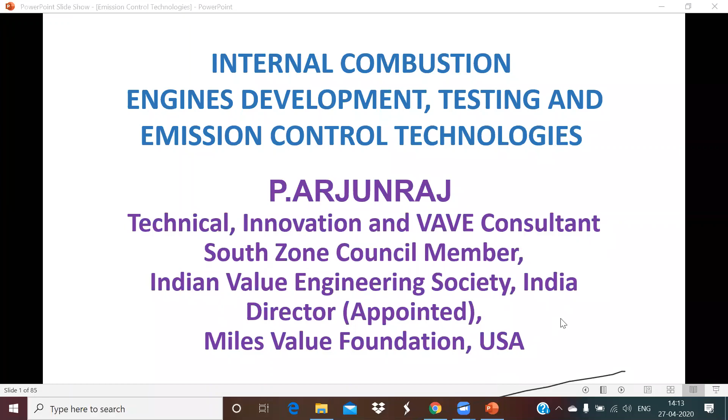The first one hour, I'll just give some brief introduction. As you know, all of you are from mechanical background, so I want to touch upon some basics. I request everyone to put it on mute.

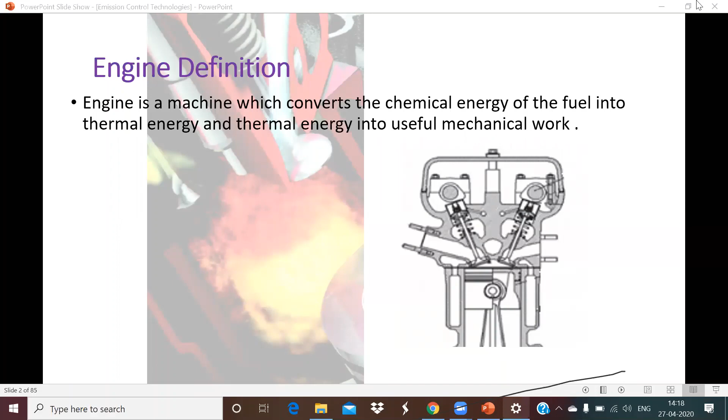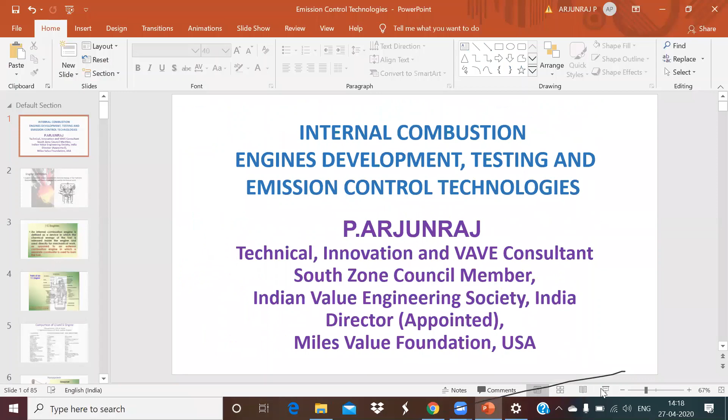I request everyone to mute, actually, because I'm getting disturbance while taking the seminar. So as I said, the law of conservation of energy is happening in an engine. An engine is a machine in which the chemical energy out of fuel is converted to thermal energy, and in turn, this thermal energy is converted to mechanical energy. So when I say law of conservation of energy, energy can neither be created nor be destroyed, but it can be transformed from one form to another.

So here, as I said, gasoline, petrol, is nothing but a chemical formula or chemical energy. Similarly, diesel also has chemical energy in it. When petrol or diesel is put into the vehicle, what happens is that we get heat out of it by burning the fuel. Heat is nothing but thermal energy.

And in turn, when heat is developed, what happens is that the camshaft and crankshaft rotate, and finally we get the output, which is nothing but mechanical work. So here there is a conversion of energy taking place, from chemical to thermal, and then thermal to mechanical. So how can I define an engine?

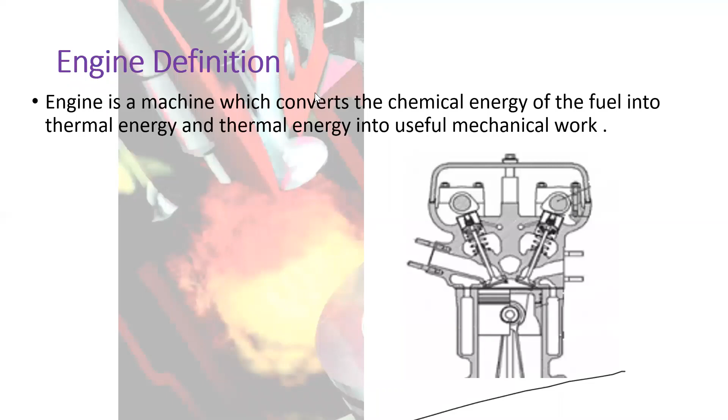So you define the engine in this way so that it will impress people. Even when somebody asks you to define it in an interview or something, you can define the engine in a more elaborate manner like this.

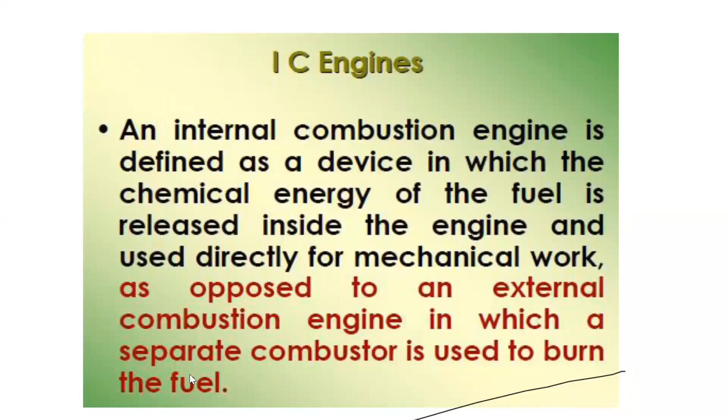So you know two types of engines: one is the internal combustion engine, and the other is the external combustion engine. In automotive, we'll deal with internal combustion engines. An internal combustion engine is defined as a device in which the chemical energy of the fuel is released inside the engine and used for doing mechanical work. In the case of an external combustion engine, you have a separate combustor which is used to burn the fuel.

This is quite interesting. I'm going to compare the parts of an engine with the human body. We have legs - the human body has legs, and the leg for an internal combustion engine is the cylinder block. We have the heart for a human body; similarly, the heart of the engine is the piston assembly. The piston has a piston ring, piston pin, and the piston assembly itself.

We have the nose to breathe air in; similarly, the intake manifold is the one through which air enters into the combustion chamber. In the case of diesel and gasoline, it's air and fuel mixture.

We have the head; similarly, the head for an engine is the cylinder head, which is located at the top. We also have hair above the head, which is basically for protection. Similarly, the engine will have the cylinder head cover, which is not mentioned here.

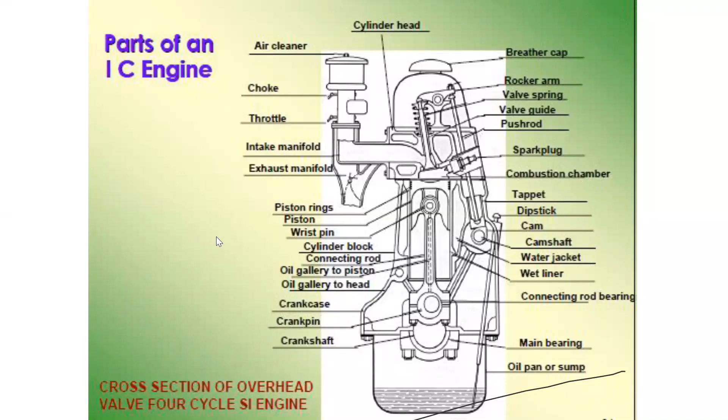So this is just a basic introduction. Then I will go on with the main topic of how we are reducing emissions using control technologies.

Emission control technologies can reduce emissions in SI or CI engines in two ways. One is with the help of the internal structure inside the engine, and the second is by using some external after-treatment. A third way is also possible with the help of the fuel.

If you have a high quality fuel, either gasoline or diesel, having a lesser sulfur content, less than 10 ppm, then we can achieve lesser emissions.

First I will give some basics about the difference between the compression ignition engine and the spark ignition engine. I think you might have studied this in thermal engineering, but I will highlight it once again as a refresher.

The compression ratio is nothing but the ratio between the total cylinder volume and the clearance volume: Vs plus Vc by Vc. You would have studied this definition of compression ratio in thermal engineering.

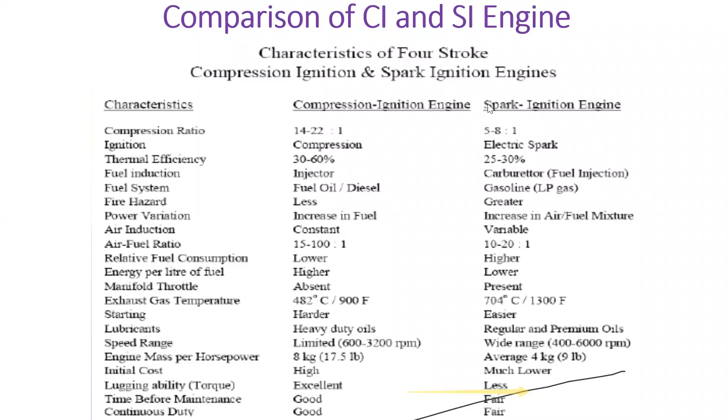So you know the horsepower, okay? So the unit of engine is measured in horsepower. So we have the muscle power, okay? For a human body, it's a muscle power. Similarly, the horsepower is a unit of an engine, okay? How can I define the horsepower? 1 horsepower is nothing but 33,000 foot-pounds per minute.

So you can see the difference. It's not 1 feet or 2 feet; it's 100 feet. I can walk 100 feet in a minute, not alone, but by carrying 330 pounds of coal. If I'm not carrying 330 pounds of coal, instead if I'm carrying only 33 pounds of coal, then I can walk 1,000 feet in 1 minute. Or instead of telling walk, I can tell I can reach 1,000 feet in a minute by carrying 33 pounds of coal with me.

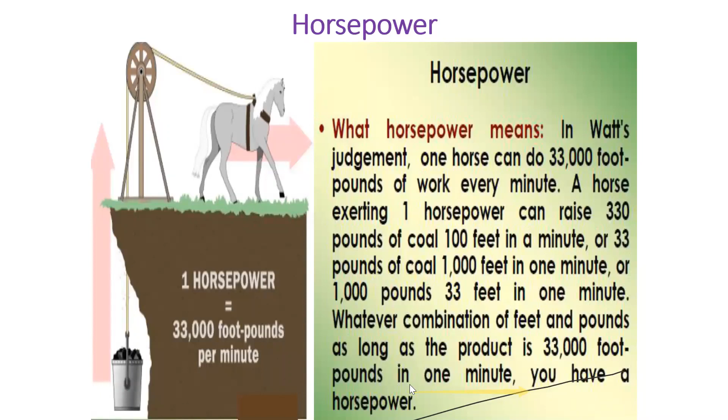Okay, so normally in company, what we do is we need to design the engine. So here we do some design calculation using the ratio called R. R is nothing but the ratio involving the connecting rod length. The engine has different components like connecting rod, crankshaft, camshaft. You have seen. So when I want to design any engine using the ratio called R, it is the connecting rod length L and the crank called A. So R is nothing but the ratio L by A.

So when the engine is smaller, the ratio will range from 3 to 4, and for a larger engine, the ratio will range from 5 to 10. Okay. When the engine size is larger, you define the value of R in between 5 to 10, and the ratio between 3 to 4 is applicable for a small engine.

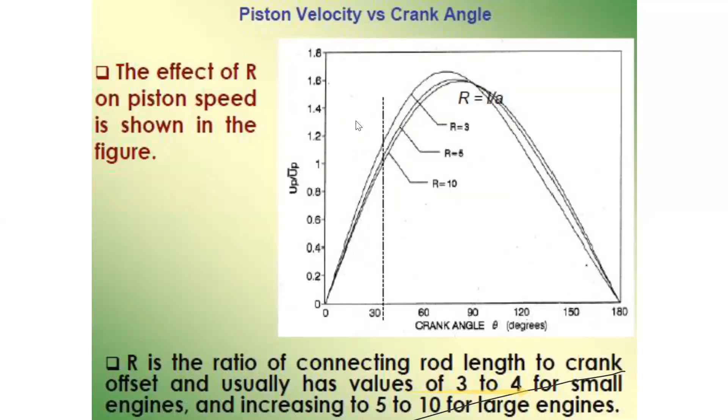So again, I need to design the engine using the cylinder surface area and the cylinder volume. Any engine will have a cylinder volume and a cylinder surface area. You know the formulas, 2 pi r L and pi r square L. Basically we also determine the bore diameter, the displacement volume, and clearance volume. All these are the general things we normally do in a company.

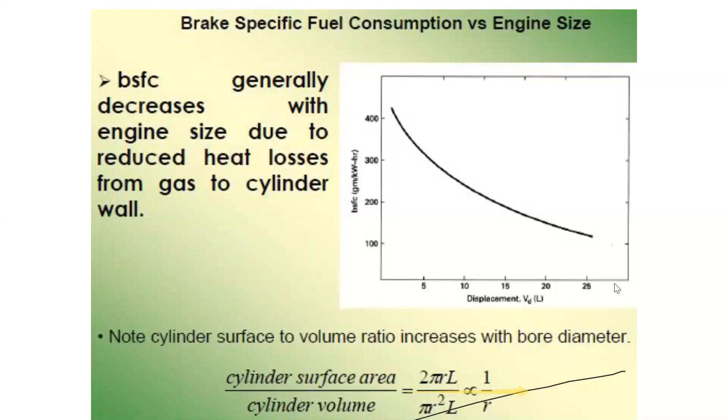I told you we have three types of energy: chemical, thermal, and mechanical. When you convert chemical to mechanical work, a lot of losses happen during the thermal stage. You know the theoretical cycle says 100% efficiency is possible, but nowhere is it possible to have 100% efficiency. It's highly impossible. If we could achieve it, the laws of thermodynamics would be violated.

As I compare the engine with the human body, we also have a lot of losses. I can compare losses even with your percentage of marks in subjects. You might study some 10 subjects on average in a semester. It is highly impossible for students to secure 100 out of 100 in all subjects. There might be a lot of losses. It can be in the form of memory loss. You might have studied completely, but because of memory loss, you may not score.

And you also have some time loss. Because of time constraints, you may not be able to attend all the questions in some of the mathematically oriented subjects. This might be the reason for you not to score 100 out of 100. Similarly, the engine has a lot of losses, and because of that you cannot get 100% efficiency.

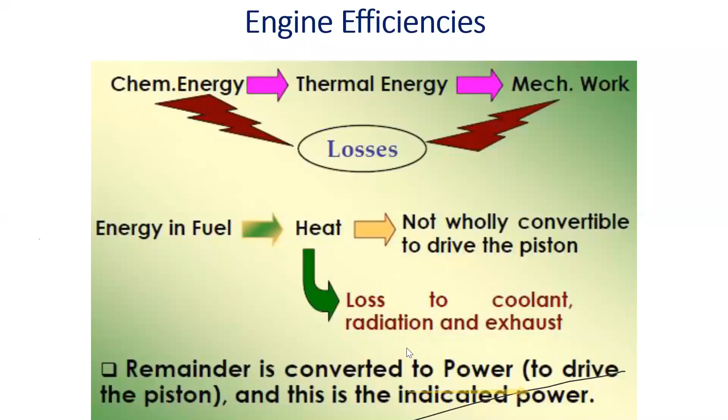Okay, so here the loss is happening in the form of radiation, coolant loss, radiation loss, and also the exhaust loss. Okay, you have three types of power. One is the indicator power, the friction power, and brake power. So you know the brake power is nothing but the output power of the crankshaft. When you're measuring the power in the crankshaft, that power is brake power. When you're measuring the power inside the cylinder, it is the indicator power.

So how can I define the friction power? Friction power is the power which normally gets developed when the engine is running at a higher speed. The engine is running at rated RPM or at high idle RPM, or when the engine is much more than the rated speed. So this friction power mostly will occur when the engine is running at higher RPM. So the brake power is defined as the difference between the indicator power and the friction power. Okay. The friction loss will happen when the engine is running at higher RPM.

Pumping loss is nothing but the loss between the exhaust and the top of the intake. You know, intake stroke. You have intake stroke, compression stroke, power stroke, and then the exhaust stroke. And again, the cycle gets repeated. After the exhaust stroke, again the intake stroke comes. So there will be a loss between the exhaust stroke and the intake stroke. That loss you call the pumping loss.

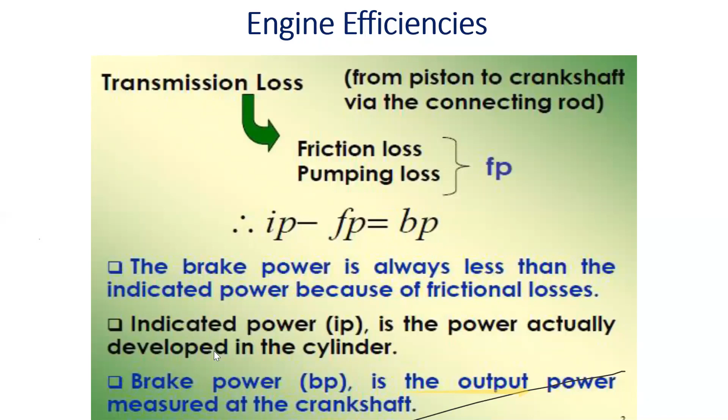Normally we can measure the engine friction using the mean effective pressure, which is nothing but the average pressure developed inside the cylinder in all four strokes. The mean effective pressure will be there at each and every stroke. So when I say the average mean effective pressure, it is nothing but the summation of all the pressures divided by all the four strokes.

Online meeting. I think some people are not putting it on mute. Already time is 1 hour, we are going to complete, but still I am very slow. I request you to put it on mute so that it does not disturb me. Okay.

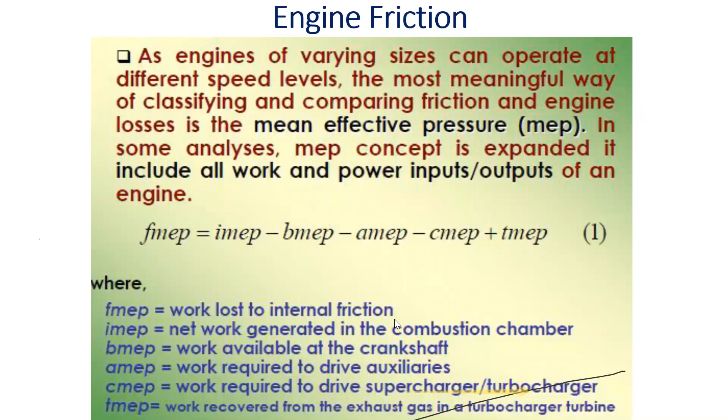So the mean effective pressure, as I said, is the average pressure developed inside the cylinder in all the four strokes. So I can measure the friction mean effective pressure using the indicator mean effective pressure and brake mean effective pressure. You have other types of mean effective pressure, from the auxiliaries, supercharger, the turbocharger. All this will be the cumulative effect to determine the friction mean effective pressure in an engine. If the friction mean effective pressure is higher, then you need to reduce it.

So when I take the dotted curve, the compression ratio is 8. You can see the compression ratio of 8 has more BSFC than the compression ratio of 10, which means BSFC will reduce when the compression ratio is higher. It means the mileage will be more. This is the reason why the mileage of diesel is more than that of petrol. The reason behind that is the compression ratio.

The compression ratio of gasoline will mostly be a maximum of 10.5 or 11:1. Whereas in the case of diesel, the compression ratio will go from 14 to even 22 or 25. And that is the reason why the BSFC is much lower in the case of diesel, and that is the reason why the mileage is more for a diesel.

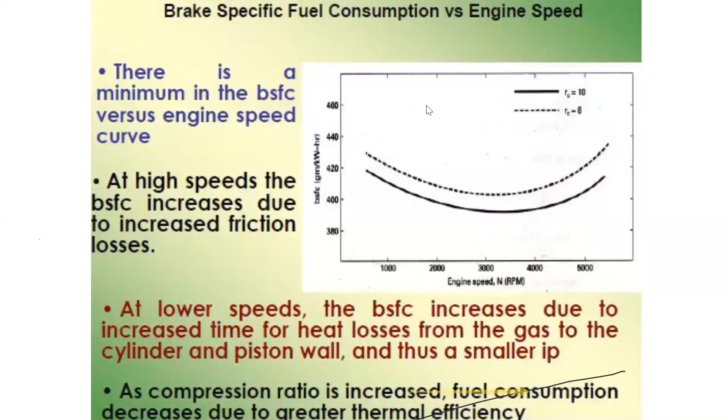Okay, you have a lot of losses in a cycle, as I said. Because of that, you cannot get 100% of the air standard cycle. Instead, you will get the actual cycle. So what are the different types of losses? You have time loss, heat loss, blow down loss, blow by loss, friction loss, pumping loss. So time loss: when I'm injecting the fuel or igniting the fuel, the time taken for the combustion to take place, that loss is nothing but the time loss.

When I'm injecting or igniting the fuel, the combustion will not take place immediately. There will be some time it takes. The time is not in the form of seconds, minutes or hours. The time is in the form of microseconds, nanoseconds. Even then there will be some loss. We do a lot of calibration to reduce the time loss so that we can increase the efficiency of the engine. And the next one is the heat loss.

When the heat is getting dissipated from the gas to the top of the piston or the cylinder, there will be some heat loss. And the next one is the blow down loss. You know the valve timing diagram. You have the intake valve and exhaust valve opening and closing, and the exhaust valve opens well before the BDC. So there will be a sudden drop in the torque or the power of the engine, which is nothing but the blow down loss.

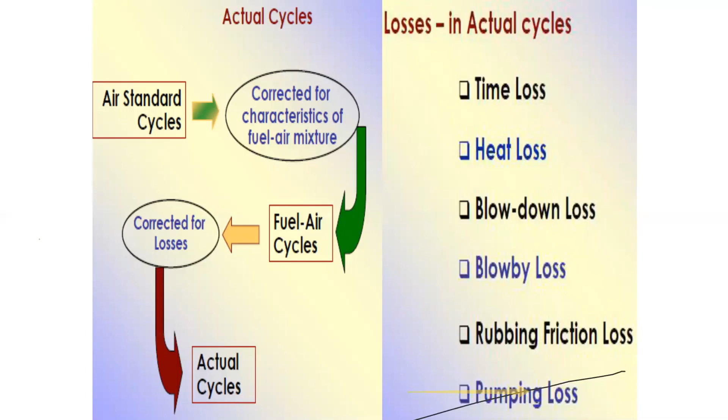The next loss is the friction loss, which occurs when the engine is running at higher RPM. And the next is the pumping loss. As I said earlier, pumping loss is the loss that occurs between the exhaust stroke and the intake stroke of the engine.

Okay. See, in older engines we have the rocker arm. Okay. The current

Is the screen visible? Hello. Okay. Yes, sir, it is very visible. It's visible, sir. Because what happened is, I can move the cursor, but I'm seeing mute, start video. Is this also visible for you? Mute, start video, security, that is not visible to you, right? Yes, sir, that is not visible. But it is visible to me, okay. You can enlarge, zoom in and zoom out. You can increase the size of the screen also. Everyone from their mobile can increase the size. Just zoom in and zoom out. Okay.

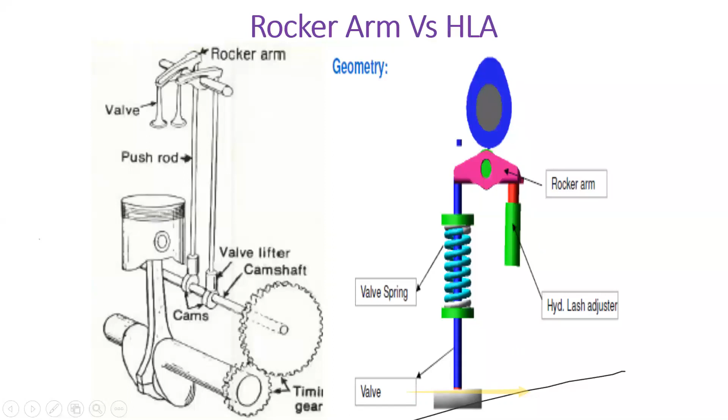So nowadays, in older engines we have seen the push rod. This push rod is being replaced with the hydraulic lash adjuster. This hydraulic lash adjuster will adjust the clearance. In older engines, the push rod adds a lot more weight and noise, but this is minimized with the hydraulic lash adjuster. So now I will tell you

I think people have to put it on mute so that it will be easy for me.

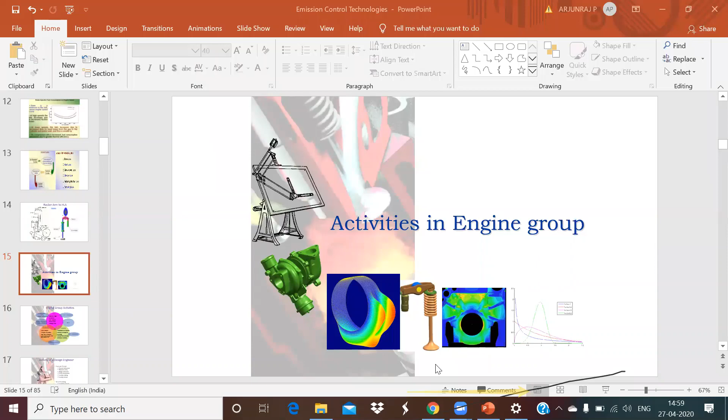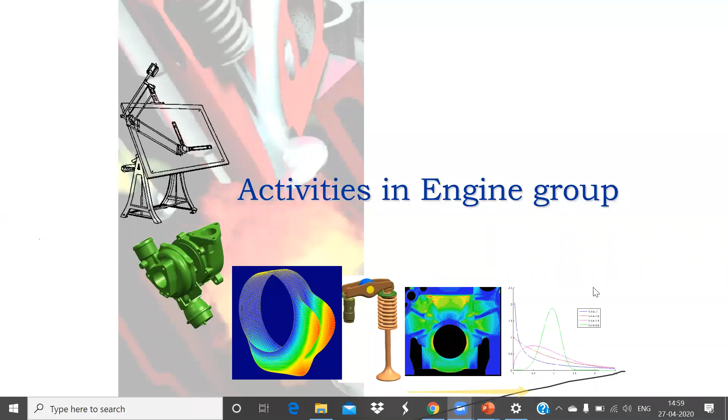So what are the different types of activities that we normally carry out with respect to the engine group in a company? We have different departments: design, development, calibration. In the design department, we do the concept design, the design benchmark, the prototype. We also do failure analysis, different types of testing, and calibration activities for performance development, emission development, environmental correction, drivability calibration, etc. So we do a lot of testing also.

Here we are ensuring the engine reliability and testing is good with respect to the engine as well as the engine along with the vehicle. We also do CAE, CFD. Similarly, we do NVH. We do the engine assembly and the integration with the vehicle.

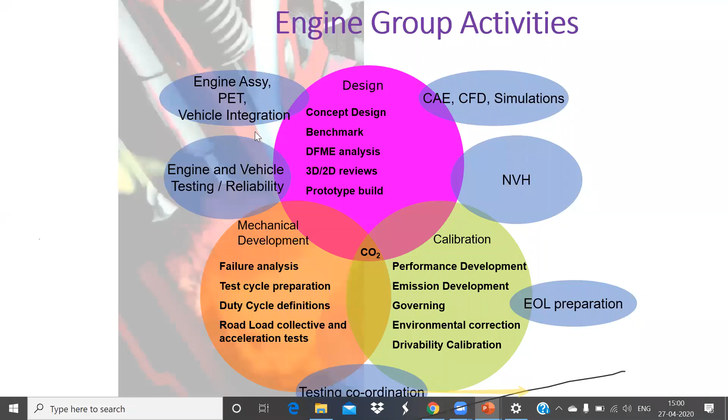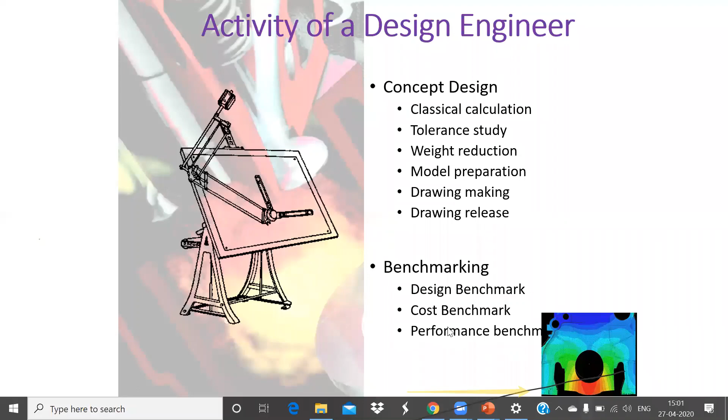As design engineers, we do the calculation, GD&T tolerance stackup, tolerance study, weight reduction technologies. We do the drawing preparation, 2D, 3D, and the design benchmark, cost benchmark, performance benchmark. Performance and cost are very important aspects, even with respect to value engineering. Initially I was telling you about my role in value engineering. That technique helps the company reduce cost and increase performance.

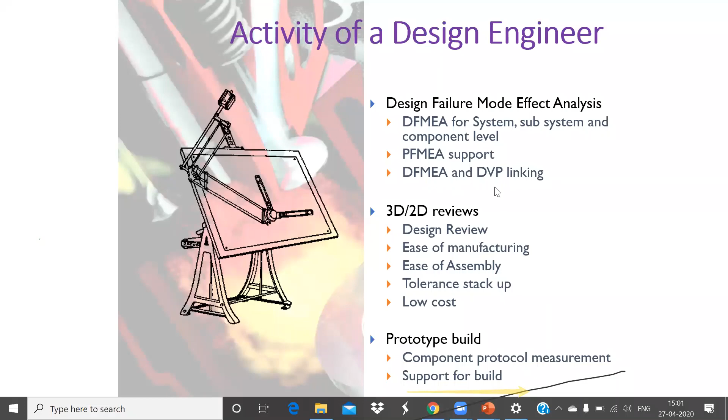We do other design activities: design failure mode effects analysis, process flow failure mode effects analysis, design verification plan, the 2D, 3D prototype build, and the testing also.

In any process or product life cycle, we start with the concept phase, then go to the design phase. Then we do the prototype, where we do minor tool correction. In design, we do drawing modification for anything we detect early. After proto, we do testing. After testing, batch production, and finally final production. After production, if there are any customer complaints, we try to address them.

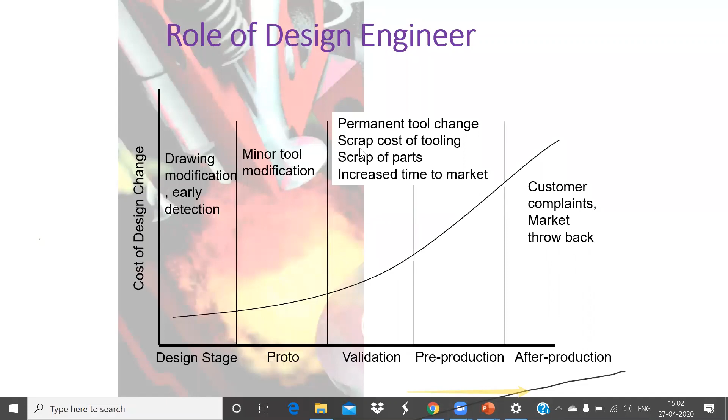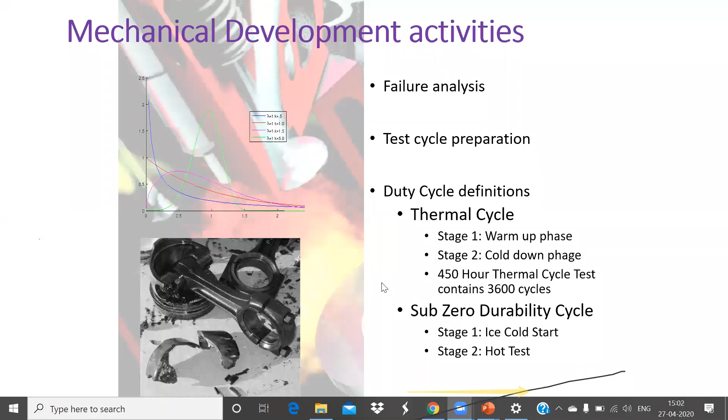We do different types of mechanical development activities in a company, where we do failure analysis and different types of testing: cold test, warm test, thermal cycle test, sub-zero durability cycle, etc. I will show you. We do the high-speed test, which is the 150-hour test. This test is carried out when the engine is running at high speed.

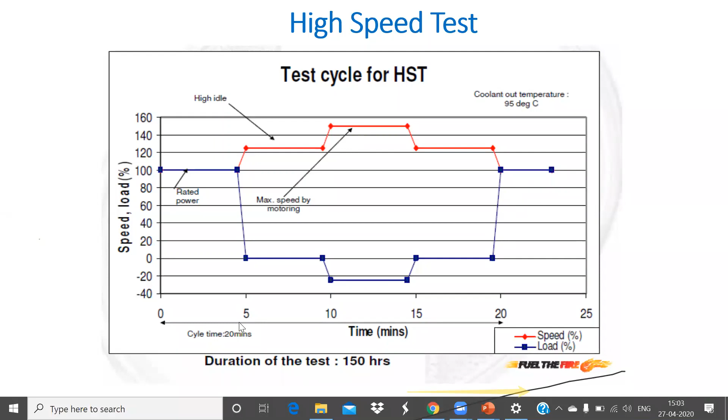You can see the red in terms of engine speed and the blue in terms of engine load or torque. This test is for 150 hours and each cycle is 20 minutes. It is meant for high-speed operation, where the engine is held at higher speed, even beyond 100%: 125% and 150% speed, beyond rated speed, in the worst case to ensure there is no failure and that durability and reliability are not affected. The next test is the rated power test, which runs for 400 hours.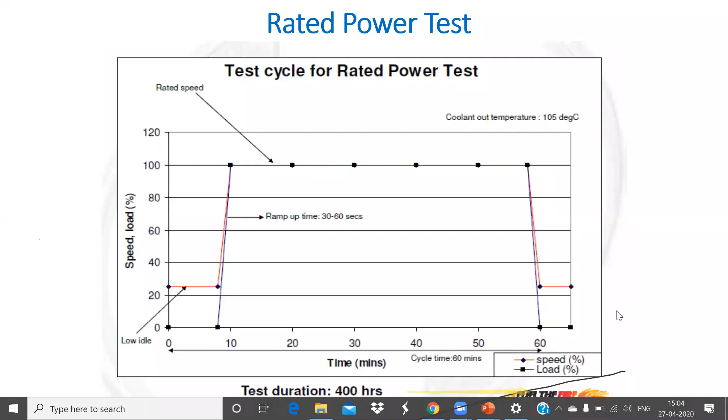The next one is the cyclic load test. This test will be slightly confusing to you. We do this test for 1000 hours, which means when I complete this test without any failure, I can give assurance that it will pass 2 lakh kilometers in a vehicle. So here we are testing the engine at minimum speed with full load, maximum torque speed condition, high idle condition, low idle condition - all combinations we test. We are also loading the vacuum pump, compressor, water pump, alternator - loading all the accessories and testing it in the worst case condition.

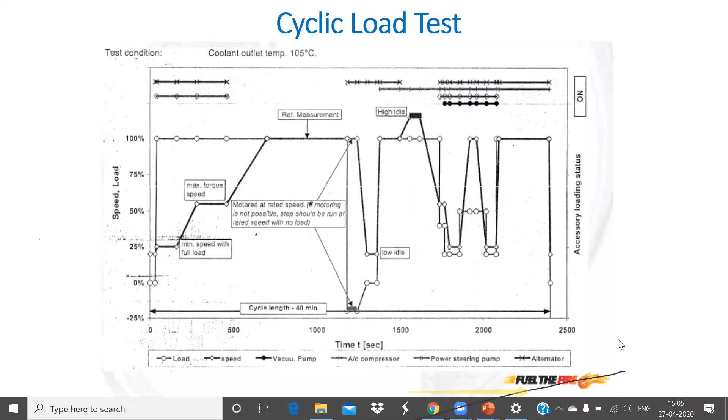The next test is the resonance durability test. The duration of this test is 500 hours. This test is meant for ensuring the vibration of the engine. Here the tests are even carried out at high idle RPM, which means beyond 100% of the speed. You can see the red and the blue happen in parallel - when I increase the speed, the load also increases, and when it goes to high idle, the load gets reduced again. So basically we are trying to ensure that the vibration is also induced in such a scenario.

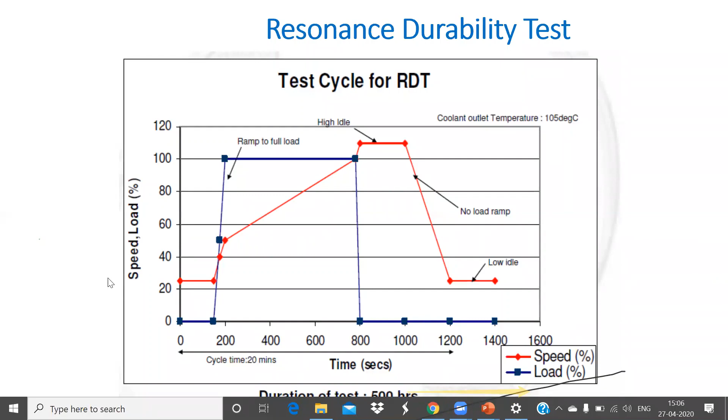The next test is the thermal shock test, where we test the engine in maximum heat input condition and minimum heat input condition. When we test the engine in maximum heat input condition, thermal expansion will happen. When the engine is running in minimum heat input region, thermal contraction will happen.

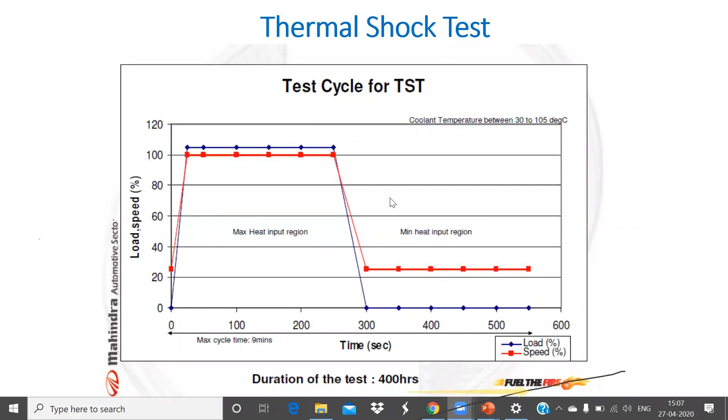So the duration of the test for the thermal shock test is 400 hours. When the engine is running in maximum heat input condition, thermal expansion will happen. When the engine is running in minimum heat input condition, thermal contraction will happen.

We also do the cold start part load test. This is a test that we do for 1000 hours to ensure that the engine is running in maximum brake mean effective pressure condition, and in that condition even the exhaust gas recirculation - that is, recirculating the exhaust gas into the intake manifold to reduce nitrogen oxide emission and also to increase the performance of the engine, basically increasing the volumetric efficiency. Here we test the engine at maximum brake mean effective pressure condition to ensure that even at maximum load, there is no effect to the engine.

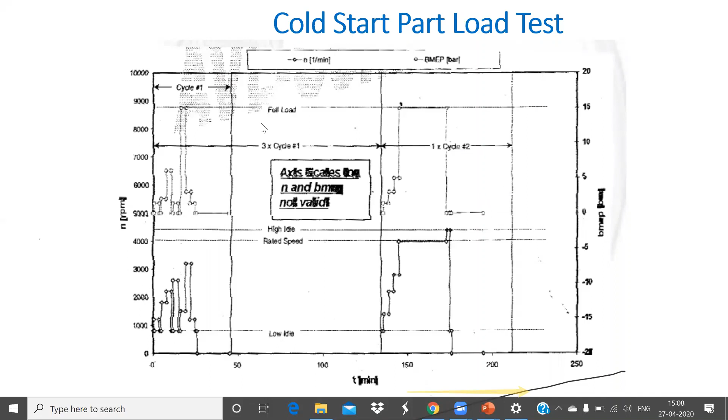The next test is the piston and cylinder head crack test. We do it for 500 hours.

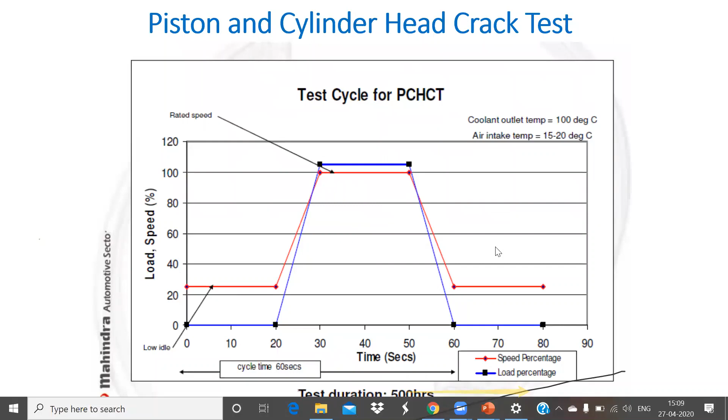We have different types of driving cycles - one is the European driving cycle, Indian driving cycle, and American driving cycle. Normally in the European driving cycle, the average speed is 120 km per hour, whereas for India it is 90 km per hour, and for US it is 140 km per hour. We do this type of driving test to the engine along with the vehicle, in a chassis dynamometer.

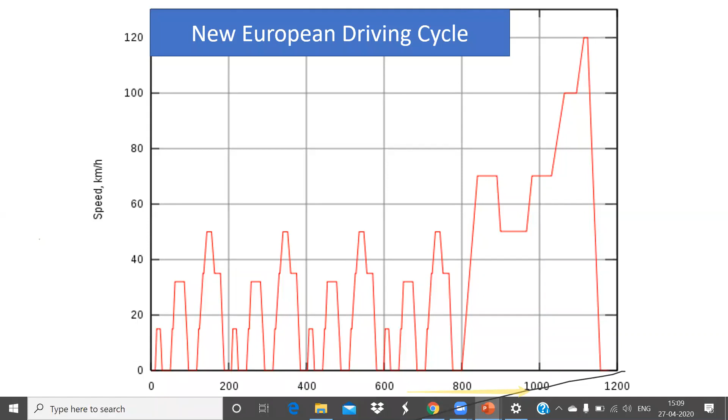We also do some standard bench type cycle tests with respect to time and air fuel ratio. So you have three types of air fuel ratio - rich mixture, lean mixture, and stoichiometric mixture. Rich mixture is where you have a higher amount of fuel and less amount of air. Lean mixture is where you have less fuel and more air. Stoichiometric is where you have the correct amount of air fuel ratio. We do this test against time versus the air fuel ratio.